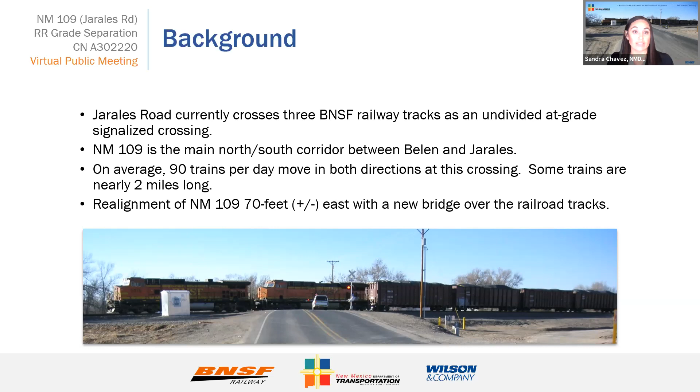The purpose of the project is to provide a safe, uninterrupted route for Jarales Road traffic across the railroad corridor that accommodates current and future rail operations. The project is needed to address several critical conditions identified for the current crossing, including physical deficiencies, safety, travel congestion and wait time, and system connectivity.

These needs are addressed with the introduction of a grade-separated intersection, which means a bridge will be built to carry New Mexico 109 over the railroad tracks.

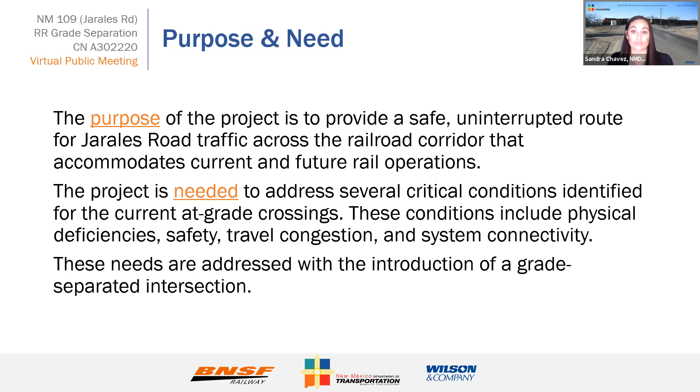This project timeline is on an accelerated schedule. Preliminary design was completed earlier this year in April to better understand all the impacts of the project. We then completed field exploration with geotechnical investigations of the ground conditions last month.

Full right-of-way acquisitions have already begun and will be ongoing through March of next year. Partial right-of-way acquisitions will begin very soon. The environmental process has been ongoing since the beginning of the year and will be wrapped up by October.

We are currently working on 60% for the overall design of the project and anticipate that milestone to be completed in October of this year.

Final design is scheduled to be completed by late spring or summer of 2022. Bridge construction is slated to begin late summer or fall of 2022, with the possibility of some early construction activities beginning sooner in 2022.

I will now turn it over to Edward Cordova with Wilson & Company to discuss the project in further detail.

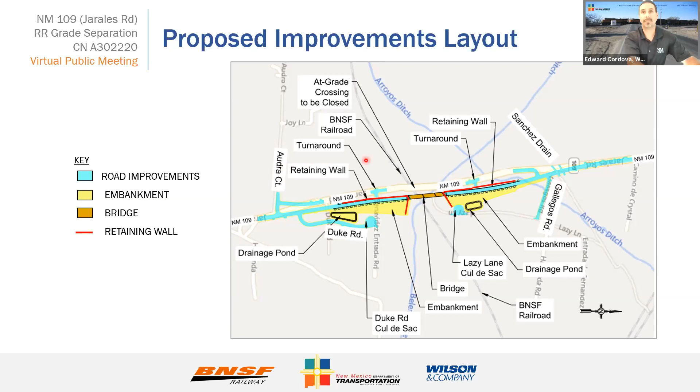As mentioned, we used the results of the Phase A/B report completed early last year to jump into design. This is the typical section we'll be proceeding with for final design. It consists of two 12-foot driving lanes and 5-foot shoulders, which is considerably more than what is out there right now. Right now, there's two 12-foot driving lanes and minimal shoulders, maybe 1 to 2 feet at best.

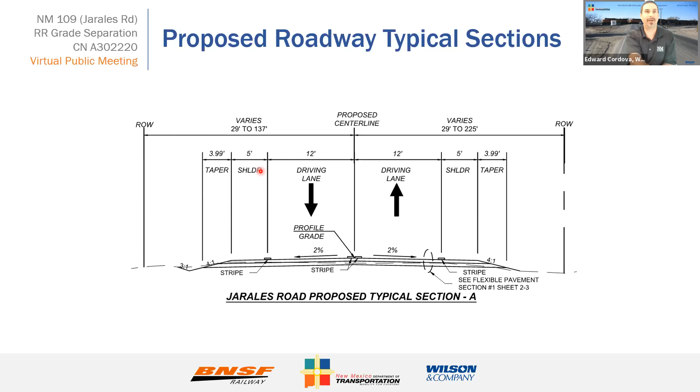As we approach the bridge over the railroad, we'll have a retaining wall on the west side of the road, and embankment on the east side of the road. We're proposing a jersey concrete barrier along the retaining wall side and just a metal barrier along the embankment side.

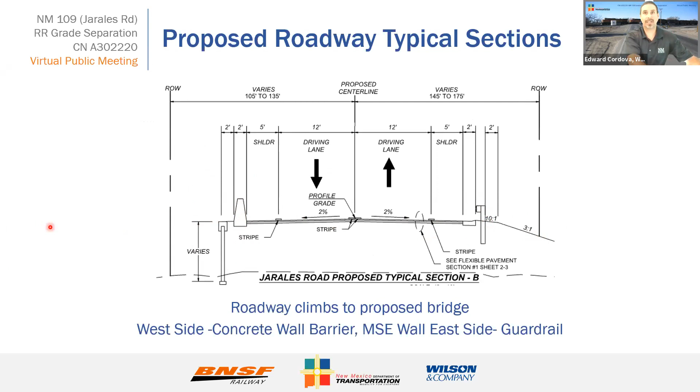As far as the frontage roads, we'll have a couple of frontage roads. We're going to use the existing Jarales Road alignment to access the residences there, and I'll show you more detail in the upcoming slides. But what we're planning on those other roads is 2 11-foot driving lanes with 4-foot shoulders.

The one exception to that is Gallegos Road. We're really narrow in there right now, probably 12 to 16 feet at best. So we're going to use 2 11-foot lanes and 2-foot shoulders on Gallegos Road.

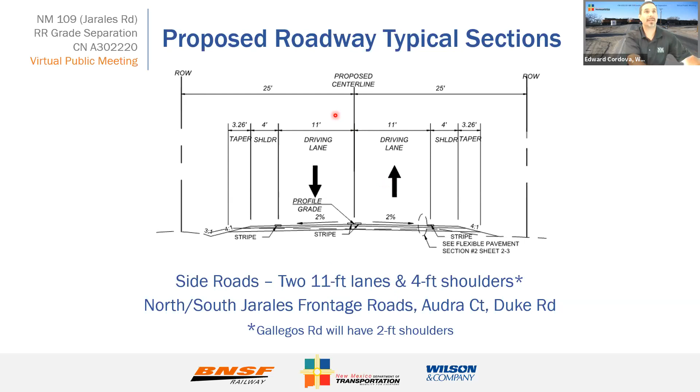So here's the blow up again. Let me orientate you: Trujillo Road, Audra Court, all on the south end of the road. The cyan, bluish-green color is the roadway improvements we're planning to do. As you can see, we tie in to the existing Jarales Road, New Mexico 109, near Audra Court.

And we proceed to the north and pull off the existing road. The existing roads are right back in here, so we pull off to the right, go up and over the railroad. At this point around here, we're about 30 feet up in the air. The red signifies retaining walls, which Callie will get into more detail. The yellow is embankment, just a fill slope.

We will have a pond to collect roadside drainage, and we will have to realign Duke Road. Duke Road was back in here, came back right here, but there's no way we'll be up in the air at this point, so we have to realign Duke Road.

As far as the residences in this area right here, we're going to consider this a frontage road and tie it back into Audra Court. And we will have a turnaround back in here, so school buses and other large vehicles can turn around. As I said, right here's the railroad.

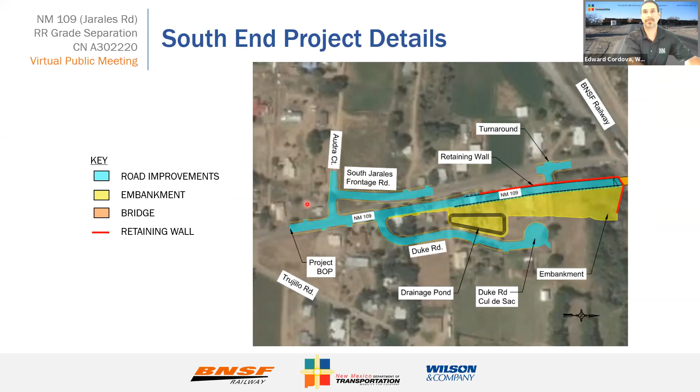So let me go to the next slide. As I mentioned, we're about a little bit more than 30 feet up in the air, about right here. We go over the railroad with a 3-span bridge, about 330 feet long. Again, Callie will talk in a lot more detail regarding the specifics of the bridge.

Again, we'll have a retaining wall on this side along the whole west side here, the red right here. We'll come back across over here, the Sanchez Drain, and tie in close to Sanchez Drain. Here's Gallegos Road right here. We're going to come back and close Lazy Lane off and cul-de-sac it.

So in order to do that, and for the residences to still have proper access, we needed to come back, and Gallegos Road was pretty narrow. So we're going to widen that to the 2 11-foot lanes with 2-foot shoulders. Again, we'll have a small drainage pond right here.

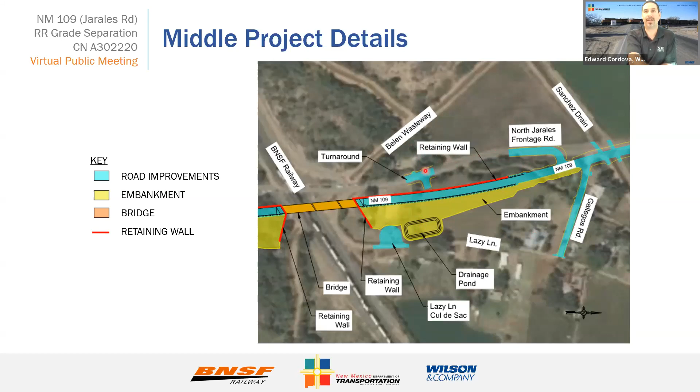Coming back again, there's a field and one residence right here that we'll come back and provide access to the existing Jarales Road alignment, with a turnaround at the very end for school buses and any other large vehicles.

So keeping going north, Sanchez Drain, Gallegos Road. We'll come back and tie back in near Camino De Crystal, where we'll come back and tie into the existing alignment.

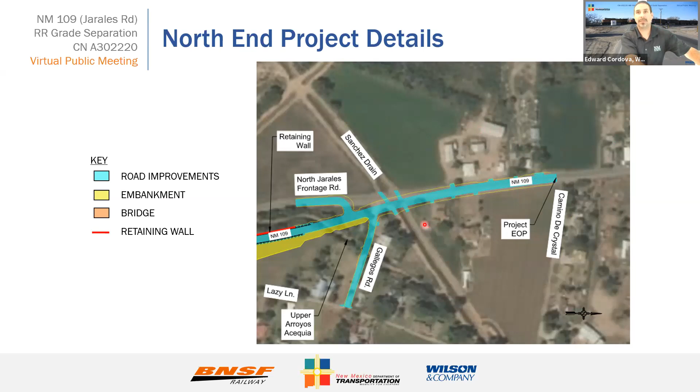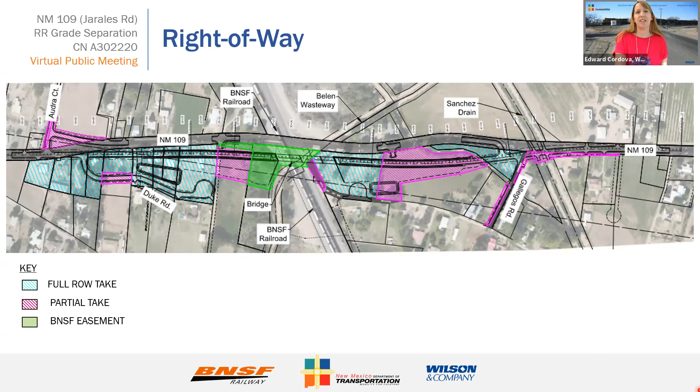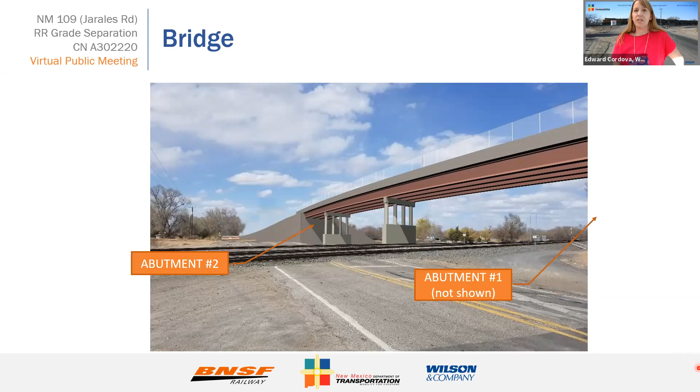This is a rendering of the new bridge structure, which carries New Mexico 109 Jarales Road over the BNSF tracks. This rendering was created from the vantage point of the existing Jarales Road, looking up to the northeast at the bridge structure. This new bridge will be 3 spans, including an abutment on each end supporting the structure, as well as 2 piers intermediately holding up the structure. The superstructure will be supported by steel plate girders, which hold up the concrete deck. On the concrete deck, we'll have concrete barriers on either side and a pedestrian railing fence.

In this rendering, you can see the north retaining wall that Edward had talked about. As you approach the bridge structure, the wall reaches heights of about 30 feet in the air. There will be a retaining wall on the north side and the south side of the project, both on the west side of Jarales Road.

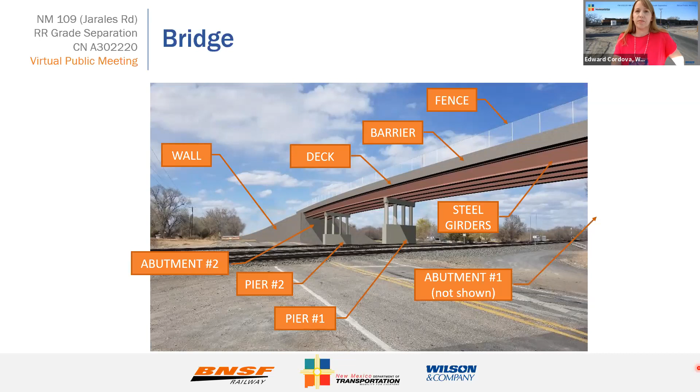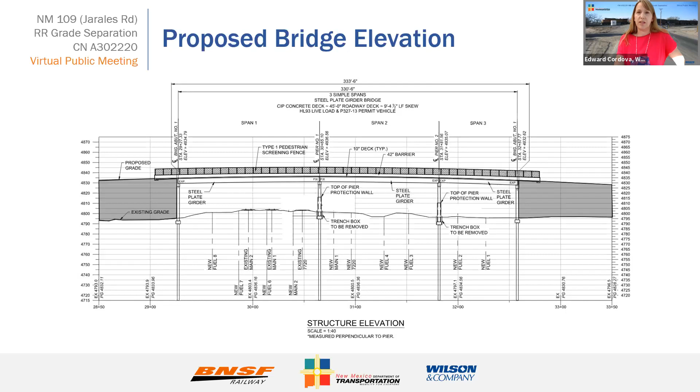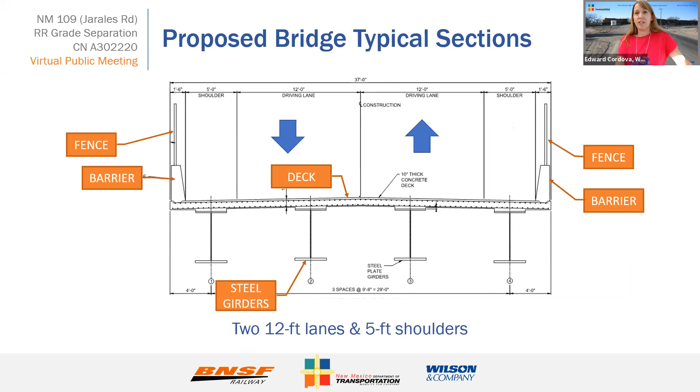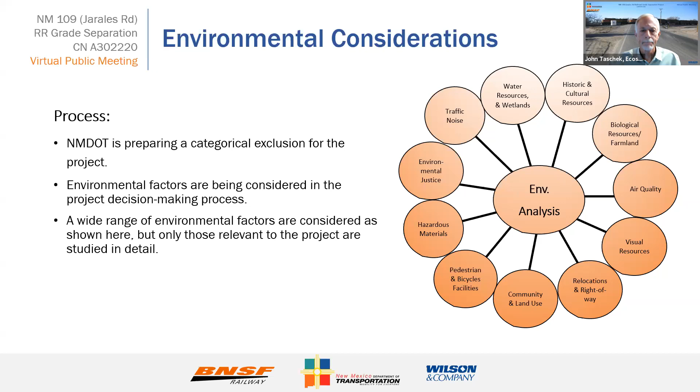Key issues for this project include natural resources. There will be minor impacts to vegetation and trees, resulting in some loss of wildlife and bird nesting habitat. Pre-construction surveys for migratory bird nests will be conducted if construction cannot be scheduled outside of the nesting season, March 15th to September 15th. Some loss of farmland from the project will occur, but access for farm equipment and the use of irrigation facilities will be maintained.

Disturbed, previously vegetated areas will be reseeded and planted with a seed mix after construction.

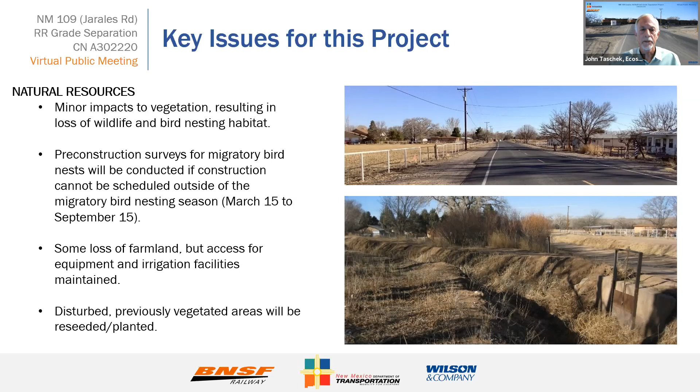For cultural resources, a full pedestrian survey of the project area was conducted and identified 3 isolated occurrences, 28 historic buildings, 3 irrigation ditches, the railroad alignment, and historic Jarales Road. The historic buildings present in the corridor were not recommended as eligible for listing on the National Register due to modifications and condition issues that impact their historic integrity.

There will be extensions or modifications of irrigation ditches, but their use and function will remain intact, and the larger system will not be modified. Impacts are also not expected to the overall historic integrity of the railroad or Old Jarales Road. Pending agency review, no adverse effects to eligible properties are anticipated because their function and character defining features will be retained.

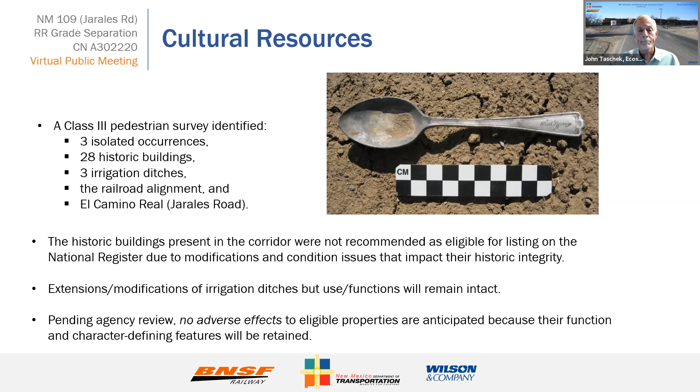For noise, we are conducting a study to evaluate future roadway noise in the residential areas surrounding the project. We expect changes in roadway noise from the higher bridge elevation, but overall noise increases are expected to be relatively low because traffic volumes and the speed limit on Jarales Road are quite low. Rail noise will likely increase from the project from the additional tracks and train operations.

For community and land use impacts, the project will have beneficial effects to safety, regional mobility, and emergency services responsiveness, which is why the project has been advanced. There will, however, be impacts to local access and neighborhood character, and as described already, the project will require residential relocations and right-of-way acquisition.

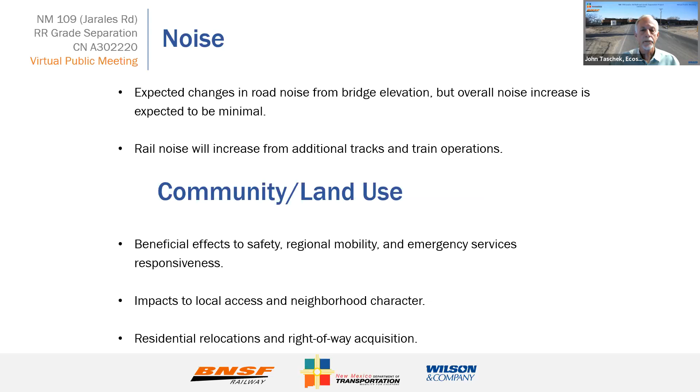Related to community impacts are the project's effects on visual resources. As shown on this slide, which includes a before and after simulation of the future bridge, the bridge would be a major new element in the landscape.

We've also done an analysis of shadowing created by the structure during various times of the day and year. This slide shows the shadow created by the bridge on June 21st at 7:30 p.m. and on December 21st at 8 a.m. Shadowing would diminish during midday, but would be present in the morning and afternoon.

The project will have some effects on visual resources, and we want to disclose this. And we invite your input on the visual elements of the project.

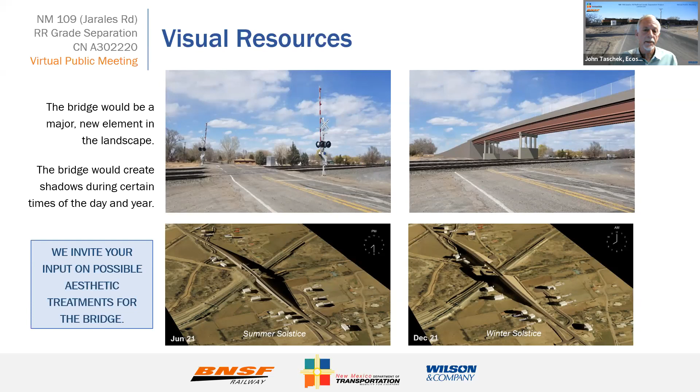The project website, https://nm109.nmdotprojects.org/, contains previous project reports, maps and graphics of the current design, a comment form, and other project information. You can review the recorded presentation and submit comments on the website as well. In addition to the live virtual meeting and website comment form, you can submit questions and comments via email.